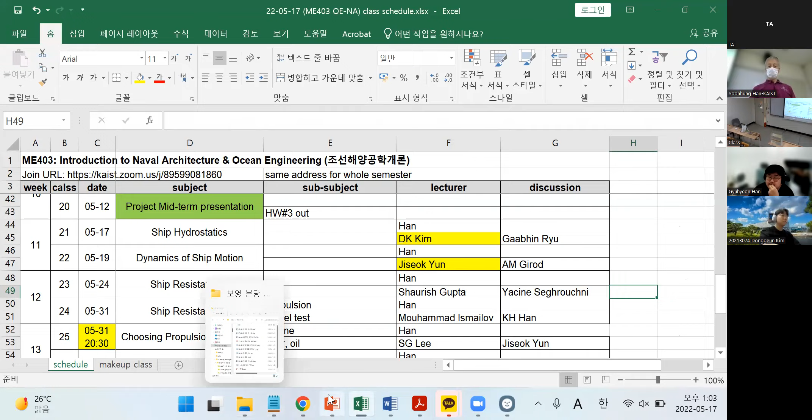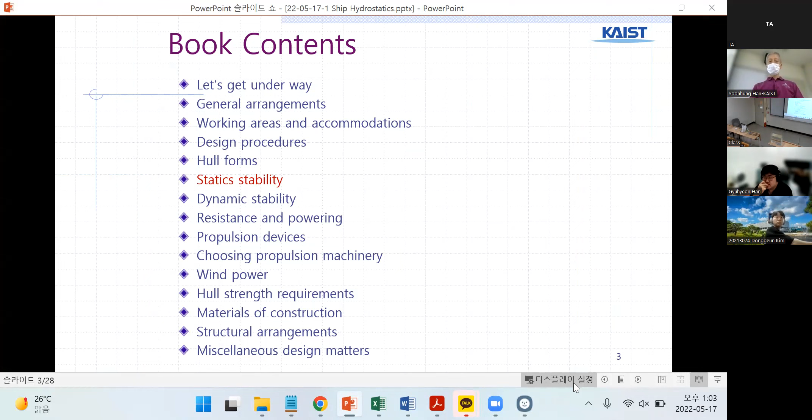So we move on to this book, second or first textbook. The chapter is on static stability. And the next chapter is dynamics, so we'll see what is the difference between static and dynamics. And buoyancy and hydrostatics, fluid mechanics.

Have you attended any class on fluid mechanics before? Most of you, so it can be just a reminder of some basics. Pressure is also taught in fluid mechanics. Buoyancy, maybe not, right? In fluid mechanics, maybe a little bit.

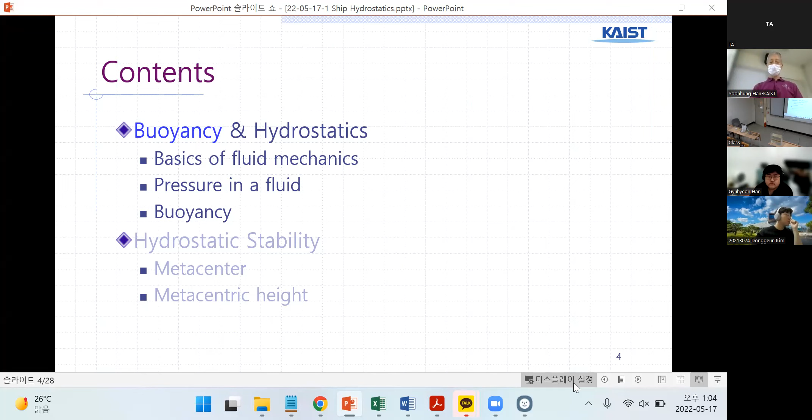So what is fluid? It deforms, and includes liquids and gases. So fluid and liquid are not the same. Fluid is a bigger concept than liquid. There is plasma, gas, and plastic. So in aerospace engineering, they say aerodynamics, it's gas dynamics. And in naval architecture and marine engineering, they say hydrodynamics, something like water dynamics. Fluid dynamics is a wider scope.

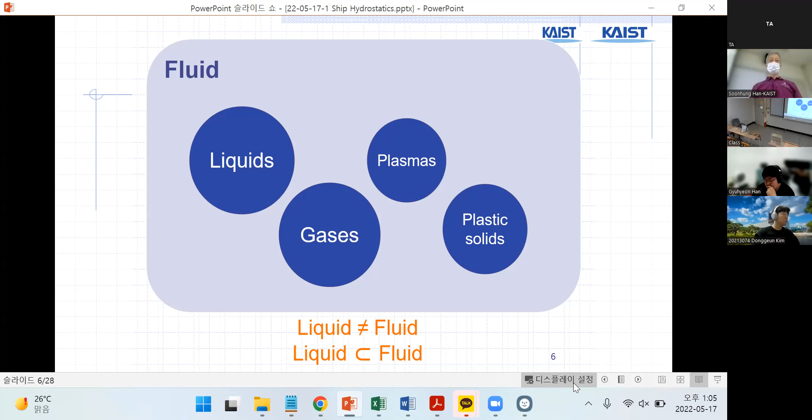All right, and solid and fluid, you already see that. Solid deforms also, but doesn't change indefinitely. Fluid cannot resist deformation force, so it changes continuously. That is the main difference.

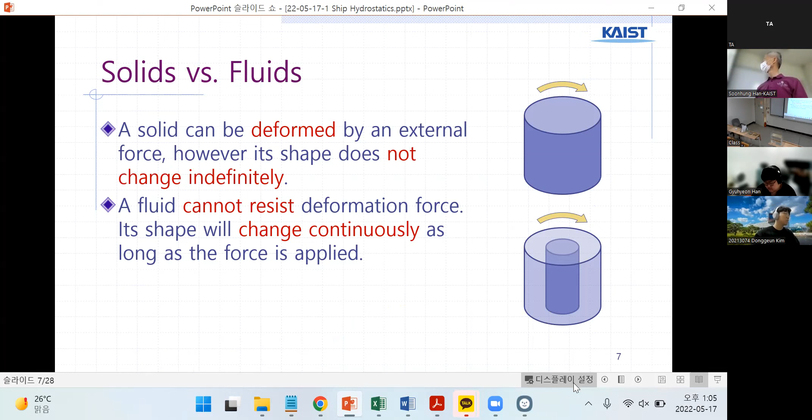You already saw this before, just to remind you, density is mass per volume, simply kilogram per cubic meter. Temperature and pressure make it change the density. Typically, air, fresh water, seawater - you see that water is 1,000 times higher density than air. And also between fresh water and seawater, there is a small difference.

That gives you, when you design a ship, the ship can travel to inland lake and also ocean. There is a case in China, Shanghai is at the end point of a long river. What's the name of the river? Changjiang, the Yangtze River. The Yangtze River is very long. So in China there are big rivers, and ships travel through the Yangtze River up to a big dam, probably the largest dam in the world, the Three Gorges Dam, like Samhyuk Dam in Korean. So the ships travel over the dam and down to Shanghai, and then sometimes travel to Korea. That kind of ship is not big because they have to travel through the river and through the gate of the dam. But because of the density difference, the submergence of the ship, the draft, changes with the same cargo inside.

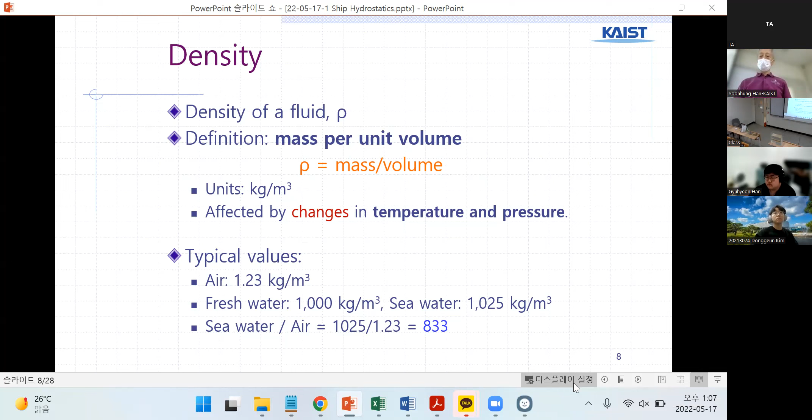And viscosity is also the resistance of deformation. We say thick fluid - there is thick fluid that cannot flow easily, right? Water is thin, but honey is thick.

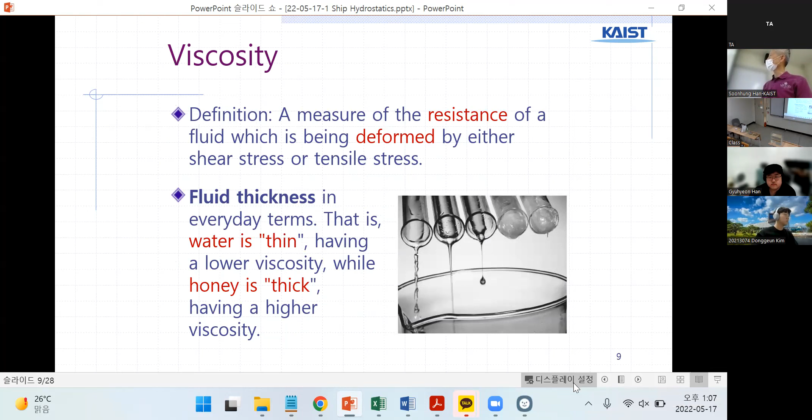Pressure is in Pascal, right? Newton per square meter, force per unit area. So sometimes not weight, but weight ratio something. And then there is bar, bar is for air pressure something, right? And then PSI, pounds per square inch. So standard atmospheric pressure is 1 bar, right? But in Pascal it's a little bit different numbers.

In fluid pressure, fluid includes gases, air, right? Fluid is a larger concept. Pressure is a function of fluid density, gravity constant, and height - same as in ship, or also in the air. The pressure depends on the height of the fluid. As I told you before, when we climb up Himalaya mountain, 3,000 to 8,000 meters up, the water boils under 100 degrees, right? Because the pressure is low. Why is pressure low? The depth of the air above us is smaller.

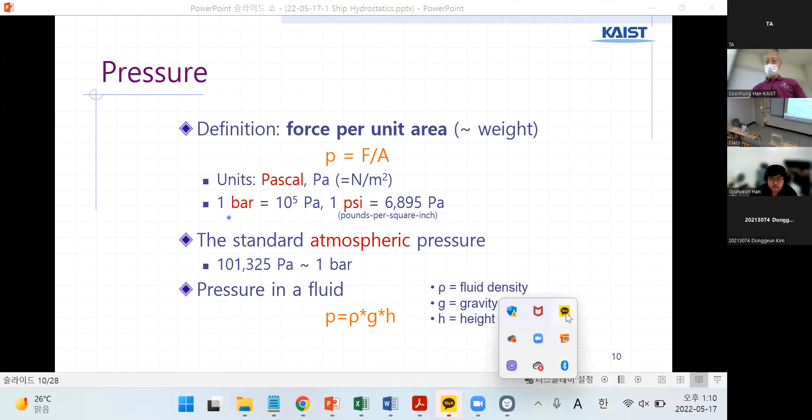Liquid and gases. Fluid includes liquid and gas. And pressure is quite different because the density is 1,000 times different. And also the property compressibility. Compressibility goes to gases, aerodynamics. So airplanes, they should handle the compressibility.

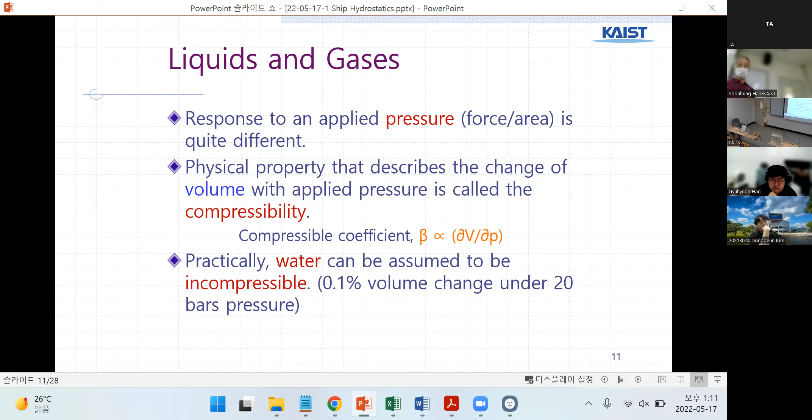Practically, water also compresses, but it is negligible. So we usually say for the calculation, simulation, equation, we assume that water is incompressible because the equation becomes very simple if you delete terms about compressibility. So aerodynamics need to handle that portion. Hydrodynamics and aerodynamics, for ocean engineering and aerospace engineering, they use this - this is inside fluid dynamics. They are specialized in air and...

Similar, but not quite the same. So density is 1,000 times different, and compressibility, nearly incompressible. And free surface - here is the wave behind the ship as it is running. The free surface is between air and water. We call this the free surface, because due to the density difference of 1,000 times, there is a change. It looks like a free surface, but this one is a shock wave.

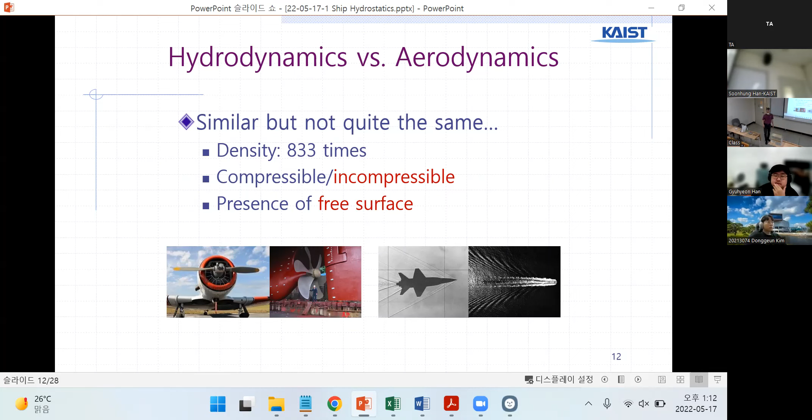We call this the lightweight of the ship. Basically, the ship has more because the engine is inside, beds are inside, a boiler is inside, more. But simplified, it is the same. So lightweight of the ship, there is a very shallow draft.

Now it is equilibrium between weight and buoyancy. Buoyancy comes from where? Why buoyancy? Where does buoyancy come from? This is the integration of pressure coming from the water towards the structure, because the structure displaces the water.

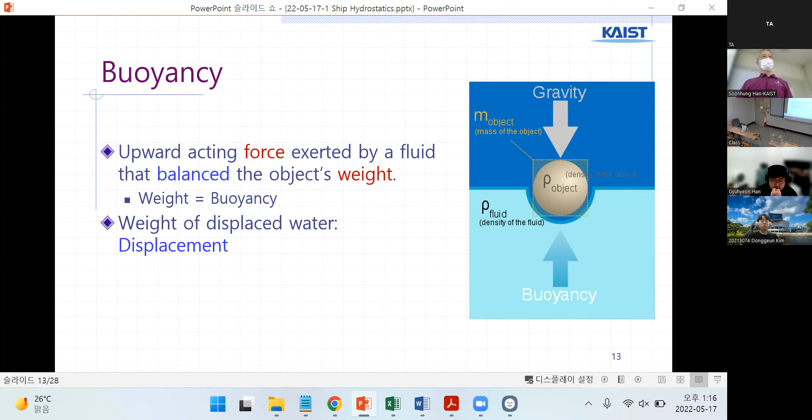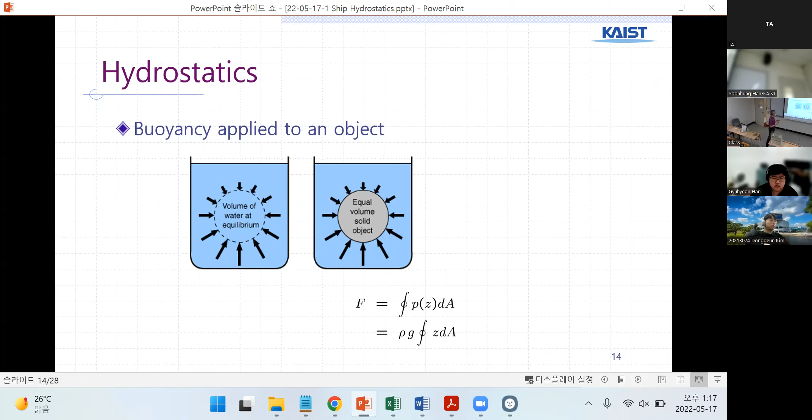Hydrostatics - buoyancy applied to an object. And pressure is different because of the depth of the water. But anyway, equal volume solid object, and how much buoyancy is applied is this kind of integration of pressure over the surface. But because it looks like the weight of this object is bigger than the weight of the water of the same amount - the displaced water, the amount of displaced water, that amount of weight of the water is the buoyancy. But still, the object is inside the water.

So hydrostatic spring - we usually say this buoyancy looks like a hydrostatic or static spring. You know about spring forces, spring force is Kx. Same as when you push down more, the response force is higher. So it's push down, more response force.

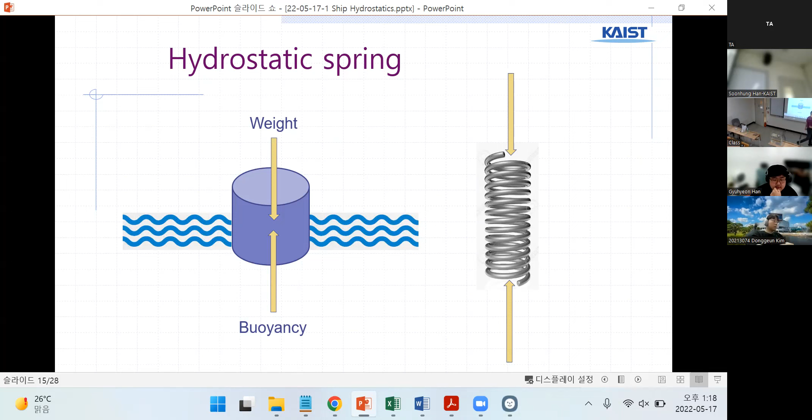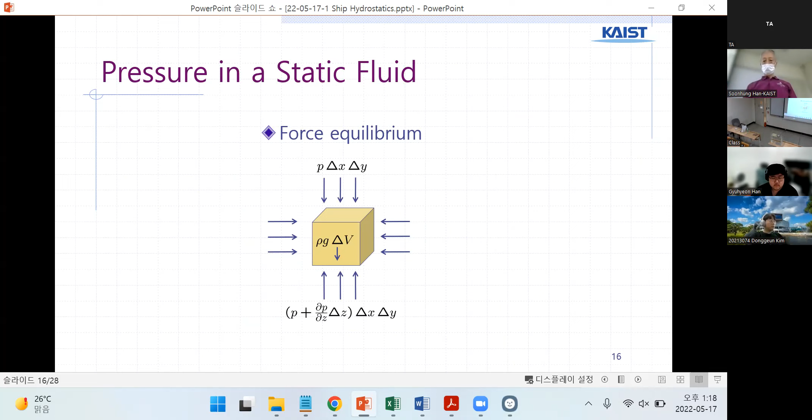Because the pressure at this point is different. And pressure difference comes from the depth of the water. That's why, but at one single point, the pressure is the same in all directions. Let's notice: at any single point, the pressure in all directions is the same size. Here and here, very small difference. But at one single point, ideally, it should be the same.

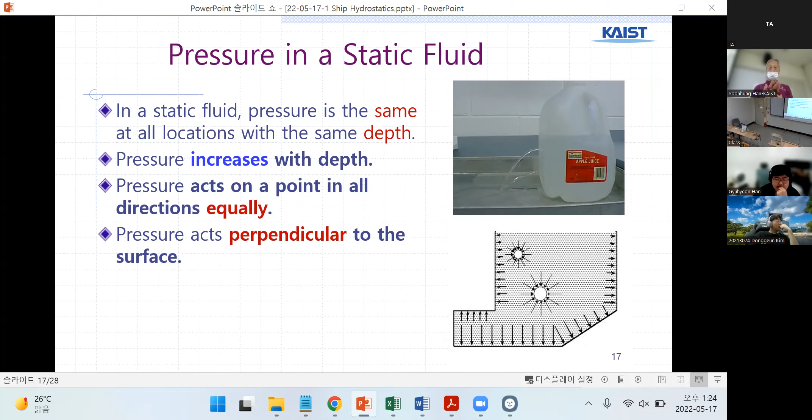Your body is very similar to this, the density of your body. As I told you, if your lung is full of air, then it will be floating. No air inside, or small air, and it goes down. Right? That is a small experiment. So hydrostatics, buoyancy, and pressure. And submerged body.

That is a submarine, right? Submarine, fully submerged. That should be neutral, meaning the weight should be very similar to the buoyancy. You need to make this submarine work with neutral buoyancy. Otherwise, the submarine goes down or floats. If your submarine is floating, the enemy finds your submarine, so you need to submerge, but if too heavy, it goes down. So neutral buoyancy is important for the submarine.

So how can you control this? You need to have an air bubble generator and also some void rooms that you can control to fill in with water or fill in with air by controlling the air generator. We call this a ballast tank. Every ship, especially the submarine, needs to have several small ballast tanks and control pumps.

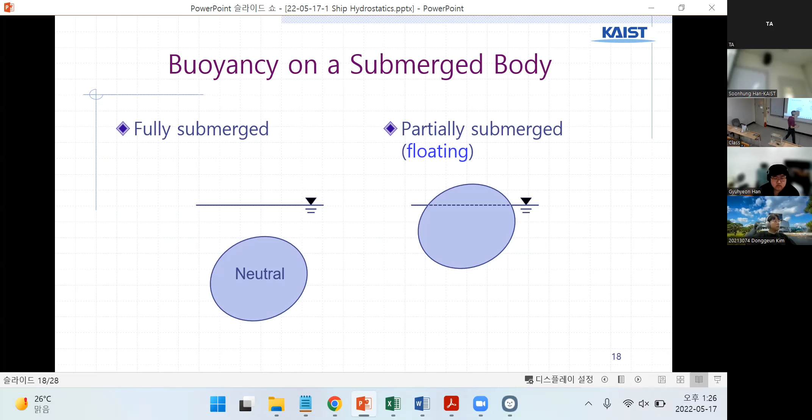So the captain needs to control the switch for pumping water and air out and in through the ballast pump, because weight is changing. Right? The ship can tilt this way, or this way, because people are moving, water is drunk, and fuel is consumed. So the captain needs to have control. And neutral buoyancy is not easy to keep, so you need control. And sometimes the submarine floats.

Iceberg. This one looks like an iceberg. Also, your body is like an iceberg when your lung is full of air, so 90% is under the water. Submarine, how does it dive and surface then? Right? This one, you see, there are two hulls actually.

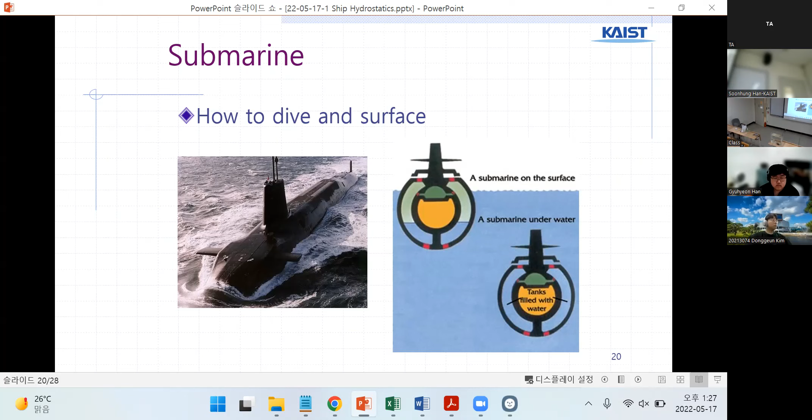We call this the pressure hull. That is important. And outside there is another layer that is not so strong. This one is very strong because you are inside here. So this steel plate should be thick enough, right? But thick is heavy. So by controlling the ballast tanks over the submarine, you need to make it neutral buoyancy or more buoyancy, more floating. So let's see the video here, how the submarine is working. What is it? This one?

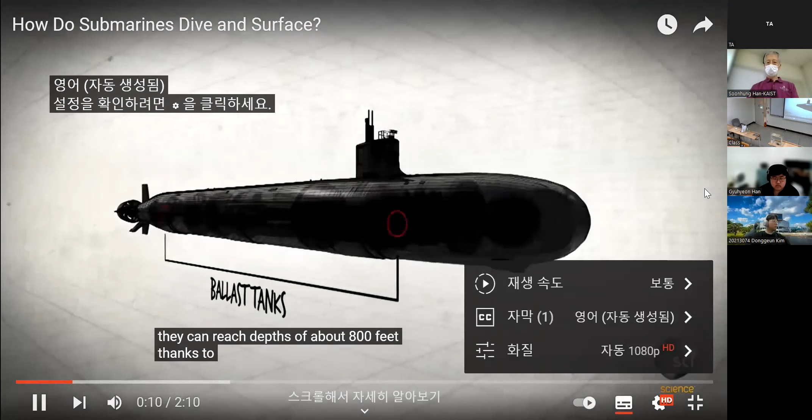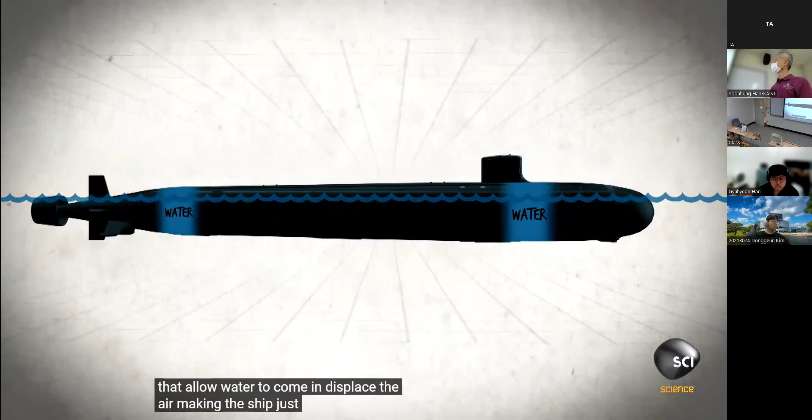They can reach depths of about 800 feet thanks to a system of internal and external ballast tanks. We have 5 external ballast tanks, normally filled with air when I'm riding on the surface. When it is time for us to dive, we'll open vents on those ballast tanks. There's grates on the bottom of the ship that allow water to come in, displace the air, making the ship just slightly negatively buoyant. We then proceed down to the depth that we want to go to. And we use internal ballast tanks to make the ship neutrally buoyant, so that then we can progress on our way in whatever depth we choose.

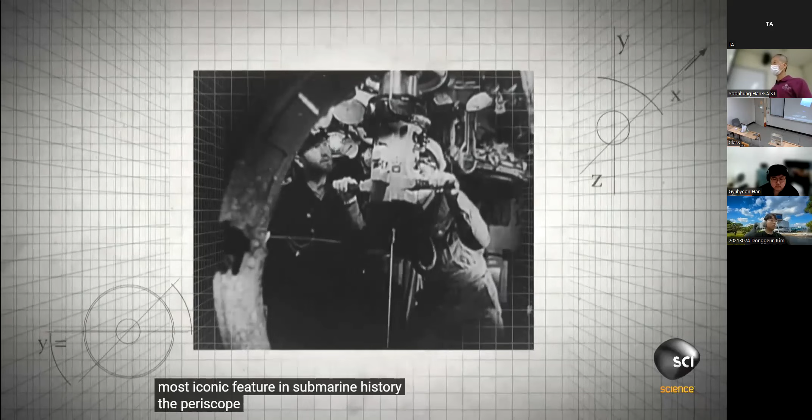The crew on board the Virginia class have an abundance of cutting-edge controls at their fingertips, one of which is replacing the most iconic feature in submarine history. The periscope has been a key component on the submarine for over 100 years, but engineers on the Virginia class are taking a bold step toward the future by replacing the periscope with a state-of-the-art photonic mast. The photonic system is a mast with a sophisticated camera system that allows what would normally be displayed just in a periscope to be displayed on widescreen monitors throughout the ship.

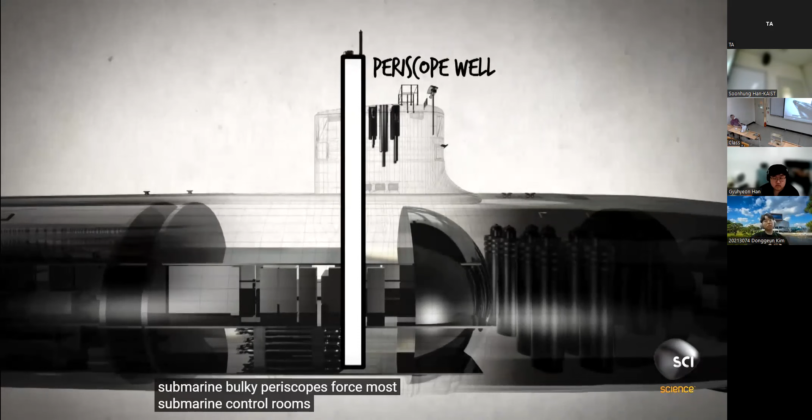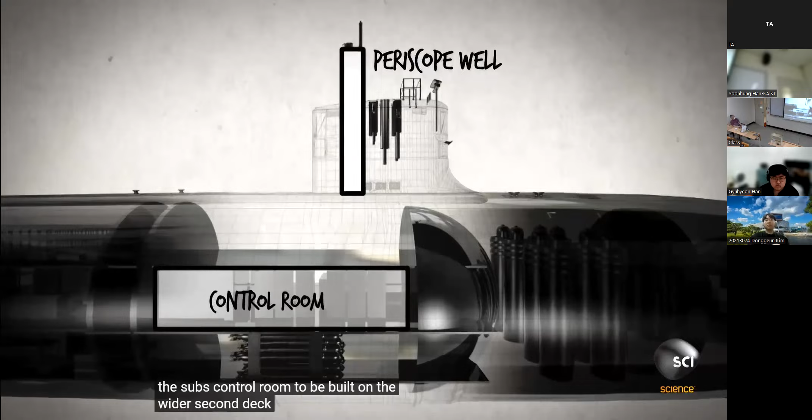And it used to have an optical periscope that came down, which drove the construction of the submarine and the orientation of all of the rooms on the submarine. Bulky periscopes force most submarine control rooms to be located on a cramped upper deck. On the Virginia class, the compact imaging equipment is housed in a part of the submarine known as the sail. This allows the sub's control room to be built on the wider second deck. My control room that I'm standing in right now houses all of the important decision makers. It really brings the crew together to operate as a team, as a unit.

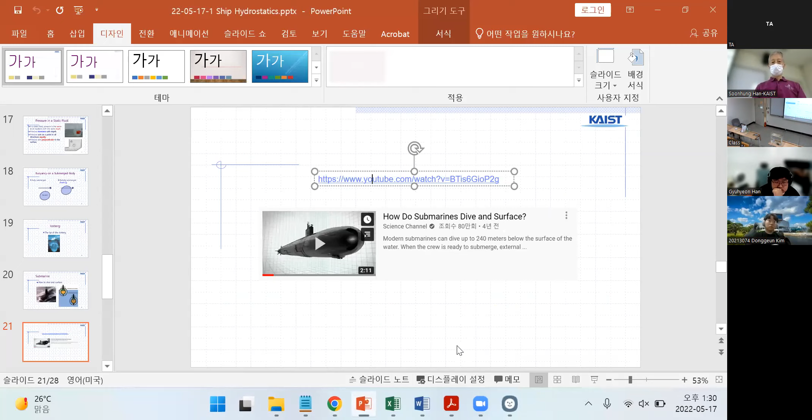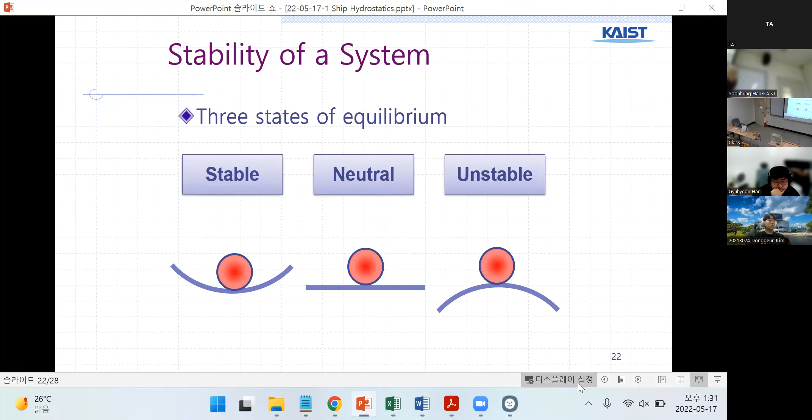Stability. So there are three states: stable, neutral, and unstable. As I told you before, you can make this stand here. When I use some disturbance, it collapses. You need a very small disturbance, but how small is different. But you need a small disturbance with this unstable system. So when we put a very small disturbance, the stable system moves somewhere, but it can return back to the original position. We call this a stable system.

Neutral, no change, still there, stay there, right? No return back. Unstable, start falling down, right? Cannot return back to the original. So simple three states of stability. Any system, right? Including ship. So stability of ship is very important. Stability of ship. Did not bring.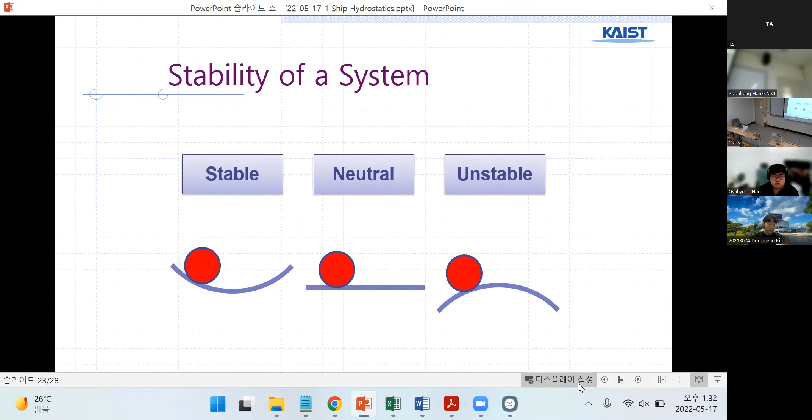This one is a submarine model. So this one, I need to have one more cap here. What to do? When I have a disturbance, oh, there is a weight. The weight is down. This is stable. It's returning back to the original position because of this heavy weight in here. Heavy weight down there. Right. Stability. Need to have high weight at the bottom side. So a ship must be sufficiently stable because the ship should pass through very bad water, high waves. Otherwise, capsize. That has happened several times, 8 years ago.

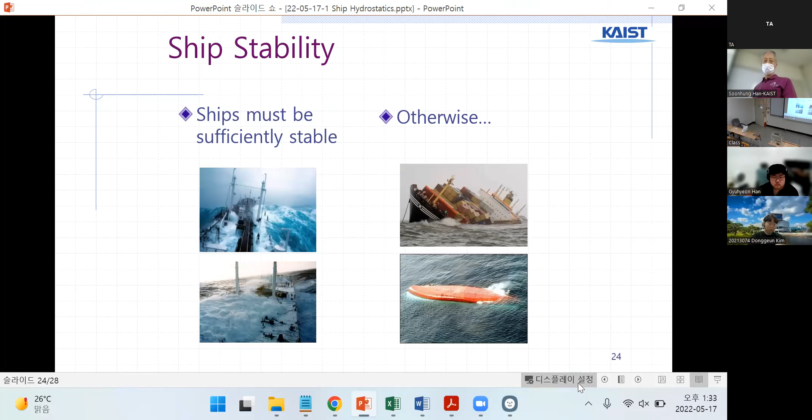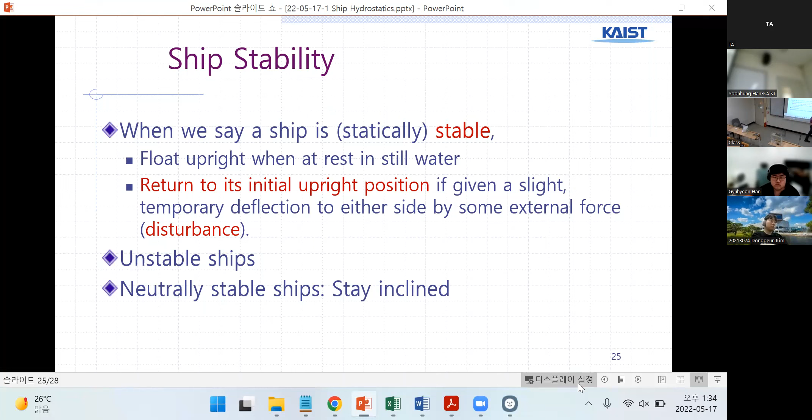So when statically stable, also dynamically stable. In this chapter, we are talking about static stability first. Floating upright when at rest in still water, and return to its initial upright position if given a slight temporary deflection to either side or disturbance. Or sometimes there is neutrally stable. So this one is stable because of the high weight at the bottom, so that when I make a disturbance, it returns back to the original upright position. That is a safe ship, right? Stable ship. Otherwise, it capsizes.

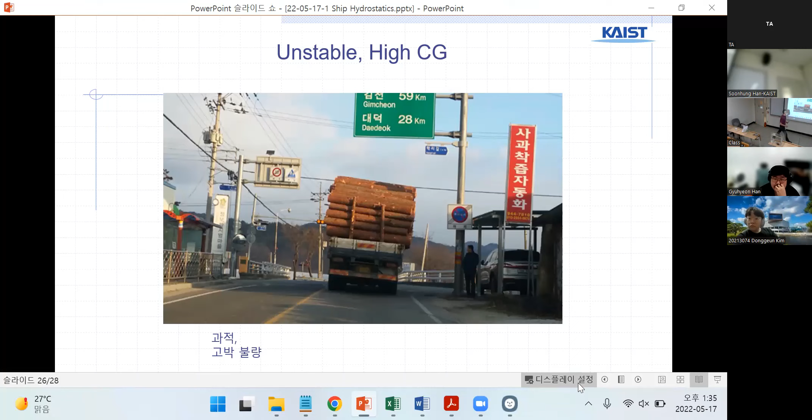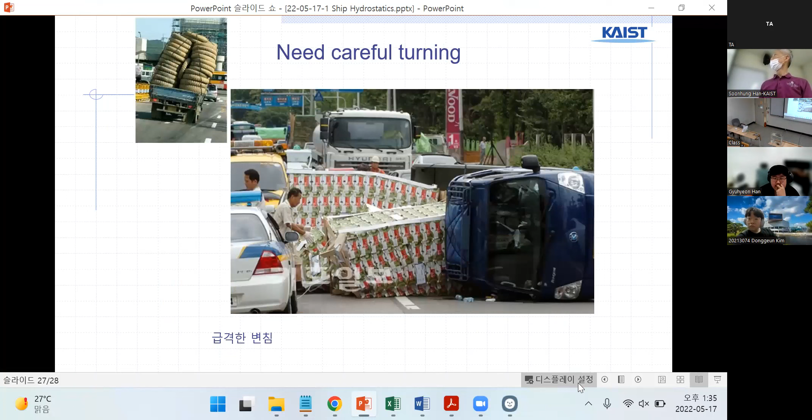So very similar to this one, because you may not have experience with the ship, you probably have experience seeing such a truck. Overloaded truck. Looks unstable, huh? Do you have a driving license? All right. So you know how to drive a car. With a normal car, you need to slow down when you're curving, right? But this case should be more sensitive. This one is unstable because the CG, center of gravity, is high. And I am saying that Sewol has very similar cases. So careful turning, otherwise it could capsize. All right.

Question? No question. Yeah. So already I finished my experiment. Then we may continue on the second lecture, right, Donggeun?